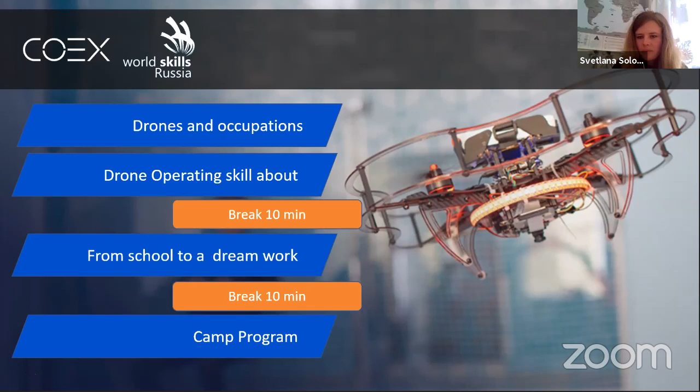We start from the simple question, what is a drone? A drone is an unmanned aerial vehicle. Drones are very popular vehicles and tools to perform any task. The area of application for drones is very wide, because the only borders of application are only in our mind.

The most popular application area is search and rescue, for people lost in a forest, for example, or another territory. Also filming and cartography, security inspection, for example pipelines, power lines, and building monitoring, science and research, of course, surveying and mapping, unmanned cargo systems. During pandemic time it was very actual, and many companies performed air delivery by drones. Agriculture area and drone swarms.

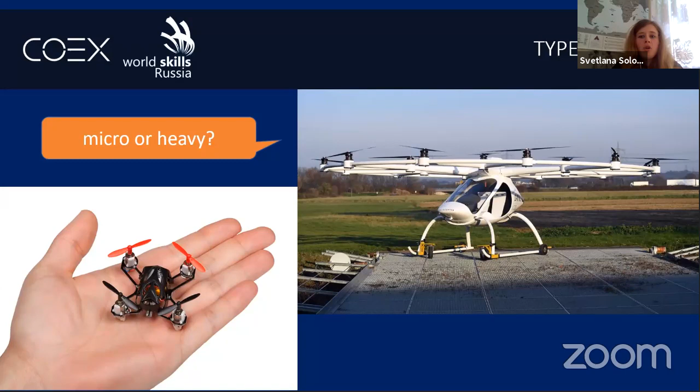Some words about occupation. In the world, we grow globally, and we need specialties such as hardware developer. It's people who make design, modeling, and production of new modifications of any type of unmanned aerial vehicle. Software developer is a specialist who can develop automation systems of navigation, such as outdoor and indoor systems. These people need to know about collection and analytics of any data or information from drones.

Also, one of the main specialties is quality assurance engineer. This engineer is responsible for installation of any developed units for drones, and also testing flights, piloting, and other troubleshooting systems and methods. And finally, drone operator. A drone operator is a person responsible for piloting in all conditions, visual or beyond visual line of sight.

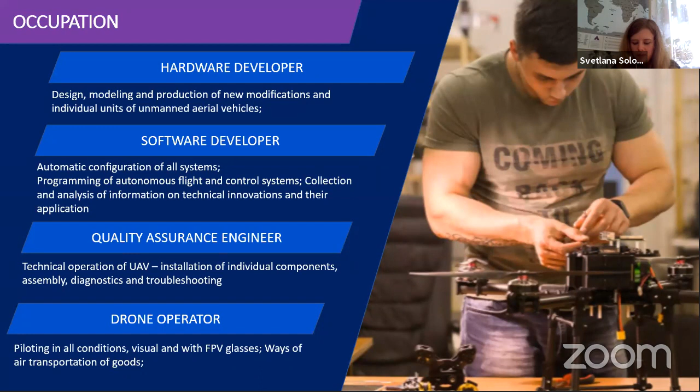First of all, it needs its area of platform manufacturers, such as charging stations or air delivery systems, etc. Next is software development for logistics and for communication between different types of robotics areas or different application areas - drones, vehicle systems, etc.

And as I said before, the world needs drone operating specialists, and our skill was founded in 2016. In this year, we ran the first national competition for 5 colleges. We had 5 participants with ages from 16 up to 22.

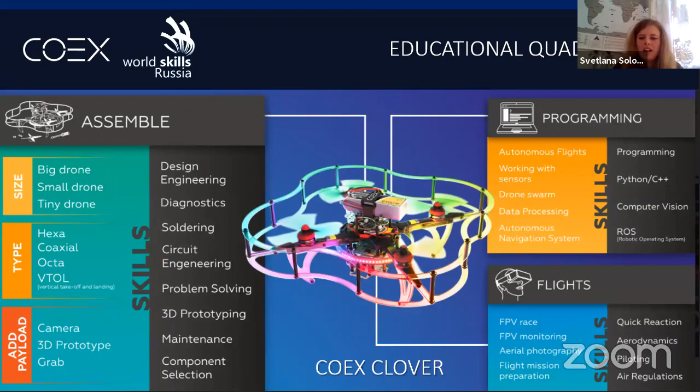And yes, of course we use an open source platform because it helps us prepare specialists. We teach them starting with the Clover - it's an educational drone kit - and then they can move on to learn about big industrial drones such as the Pelican. It's a big industrial drone, but the software and electronic components of this drone are the same as the Clover: flight controller PIXHAWK, PX4 autopilot, and Raspberry Pi 4.

This open source platform is also a ticket to the developer community. You can be part of a developer community that shares their experience because it's open source, and you can take any project and build your own project based on another project because it's open.

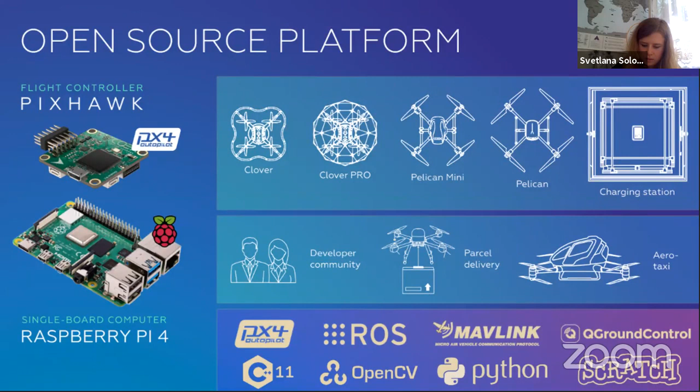This open source platform acts as a stimulus to motivate students to create drone projects. For example, in this picture you can see several projects from our students, from schools, universities, and companies - for example, face recognition, or this project from school students on recognition and control of drones with gestures. It's a project from our students from Egypt, of course.

Also, we provide events that help open up engineering creativity, such as hackathons for autonomous drones. These guys created a project with drone control by hand gestures. This platform allows sharing your project with everyone, and we use this platform - I will tell more about it later - it's called Gitbook.

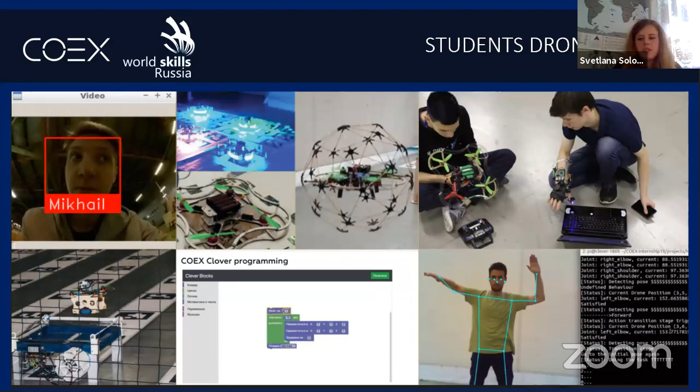So all of this is instruments for involvement and development, to motivate and develop our educational system, to make it better and more efficient. And we involve juniors, school students from 12 years old up to 14 years old.

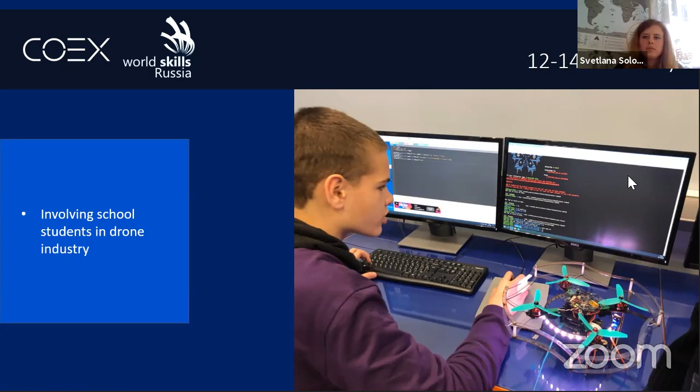For college students, this platform and WorldSkills helps to pass the exams, because in our colleges, students pass exams according to WorldSkills standards and specifications, since they have a specialty in their college. They participate in the competition, and after that pass the exams. It's a very good level for them.

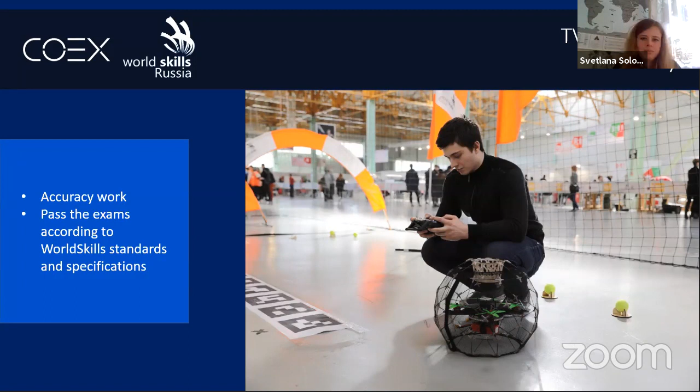For University League, we have a focus on research tasks, publishing their projects at international conferences, and of course developing a diploma project with a research component.

And there's a cross-industry competition for young specialists. These guys are given a real task without adaptation to competition. For example, they need to develop a solution for finding lost people in the forest, using a thermal camera or other sensors for these tasks. It's very difficult, but it's very useful to find the best solution between companies and specialists.

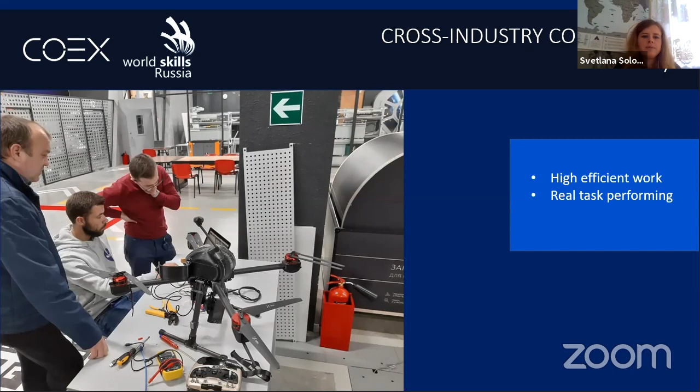Also, we have Senior Skills, since 2019. This category helps give people an opportunity to change their profession and get new experience in the newest profession, to be useful and create something new.

And one more thing, this year we extended our age categories and added new ones. There's Kids Skills for children from 7 to 9 years old, with a focus on piloting skills, visual and FPV simulator, and we also start teaching them about diagnostics of drones.

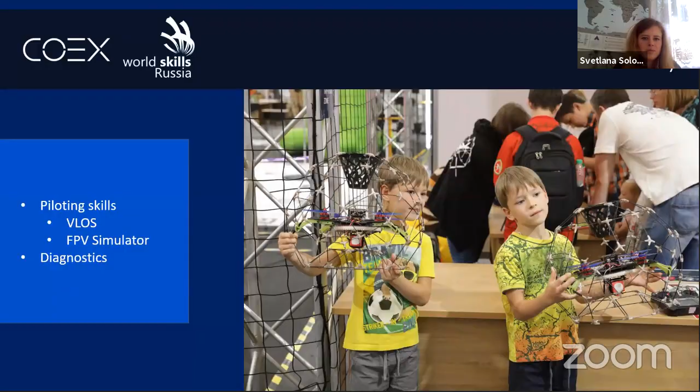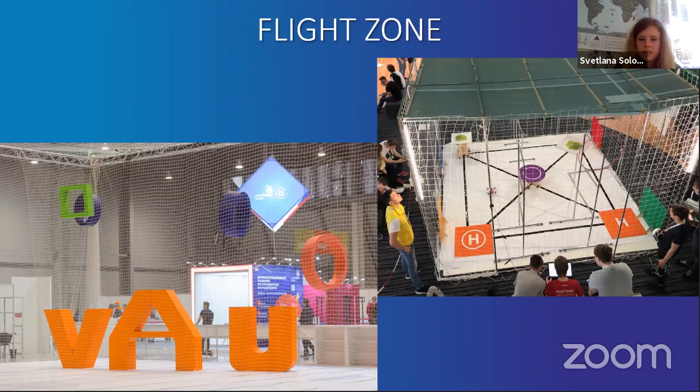To provide a competition, we need some infrastructure, and a few words about our workspace area. Of course, we need a flight zone for drone piloting, and some tools and furniture for this. But this furniture and tools are widely used.

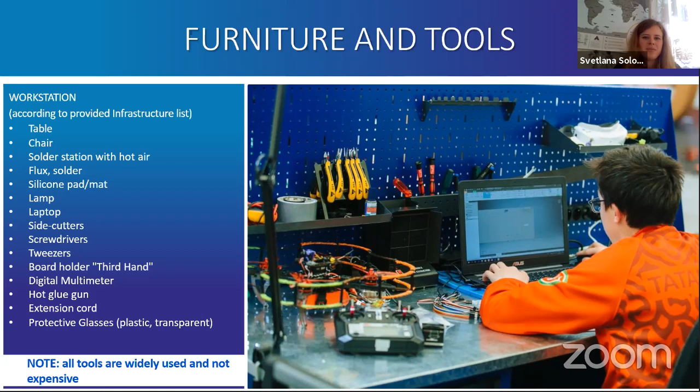It means it's not specialized or rare tools, and this equipment is not expensive. That is why drones are spreading very quickly in countries. And of course, you need drones for performing the task.

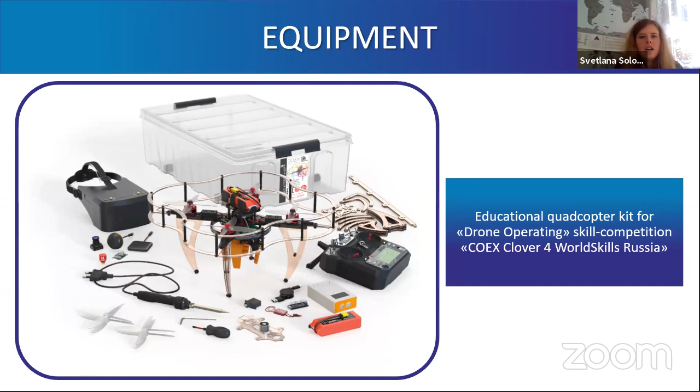We have developed not only drones, but a full educational methodological system for drone users. I'll tell you about the educational materials. All education materials you can find on our website. As I said before, all instructions and methodological materials are on our Gitbook website.

And also we have video courses for teachers and students about assembling, about piloting, and about drone programming.

All materials are updated simultaneously because we have a very big community from all over the world. Our community helps us update and add any creative projects or features to our projects. And you can be a part of this community, of course.

All materials were developed by a special educational center, the educational department of Copter Express company, called Fab Lab Copter. This Fab Lab was founded in 2017 and hosts all educational activities with drones, organizing events focused on design, assembly, piloting, and coding of quadcopters. We also host competitions and hackathons.

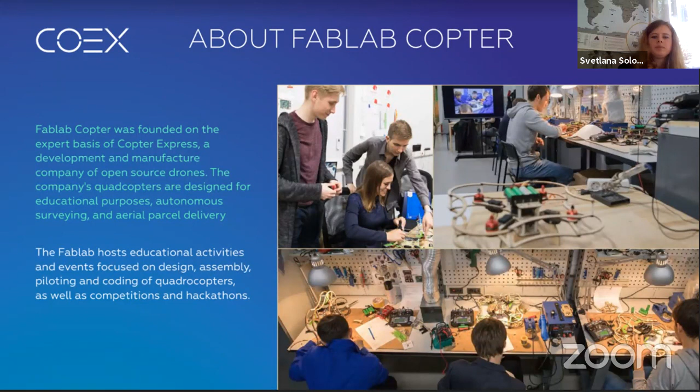At our Fab Lab Copter, we host several courses, from basic level to advanced. Basic levels include assembly, simple piloting, and starting drone coding. The advanced level is for students who want to create their own project and need some consulting and equipment, for example.

We have courses for all age categories, and this program was developed by our teachers.

Okay, next, about our course statistics. More than 2,000 people have received training on the COEX Clover drones over approximately 3 years.

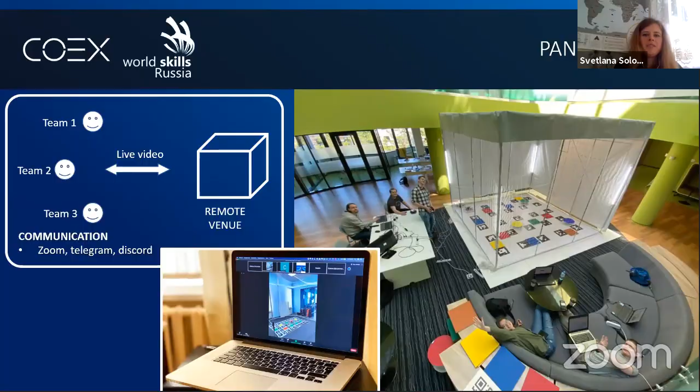So for now, our next slide is about the drone tracing skill camp. Before that, I would like to welcome our team from our remote workshop. Yulia, could you join us?

Hello everyone. Our team is very glad to see you at Skills Camp, and we will be happy to help you get new skills and knowledge.

Thank you, Yulia. Where is your video? Please turn on your video. We don't see you, unfortunately. And turn on your microphone too.

Okay, I can show our polygon. This is where all the skills camp and competition will take place, and this is our team who will help you complete all your tasks and tell you about drones, how they fly, and how to program them. And this is your drone, of course. This is our very big and friendly team, and this is our remote venue.

During pandemic time, I am at home only for today, but our team is at the remote venue, and we are ready to start our camp very soon.